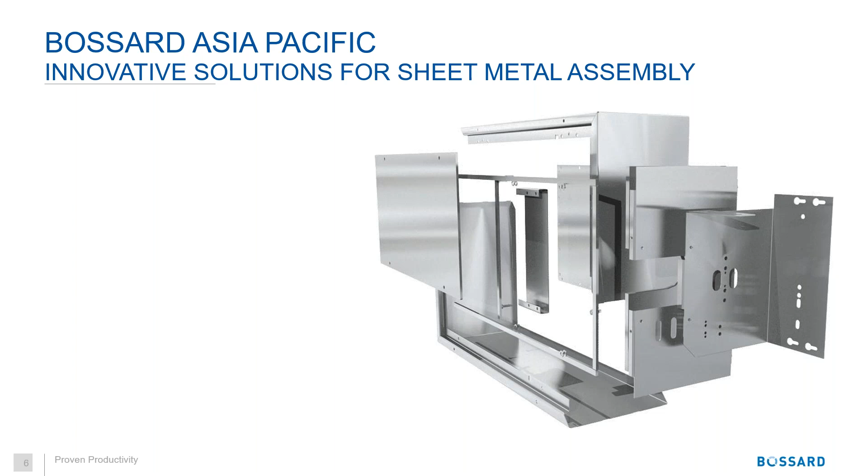So what are the motivations of the session this afternoon? Why are we taking 45 minutes? Some of the questions that our customers generally ask is, what are the fastening technologies for sheet metal assembly and how many solutions do I have? Well, it very much depends. For example, on this type of application, it depends on whether you are trying to join edges together, whether you are trying to run cables inside the box, or if you are trying to fix other elements within the box.

If, for example, you are joining 2 sides of the panel together, you might want to use either thread forming screws, self-clinching fasteners, or riveting technology. Once you've chosen the technologies, other solutions are offered to you in terms of which installation equipment is the most suitable for the application.

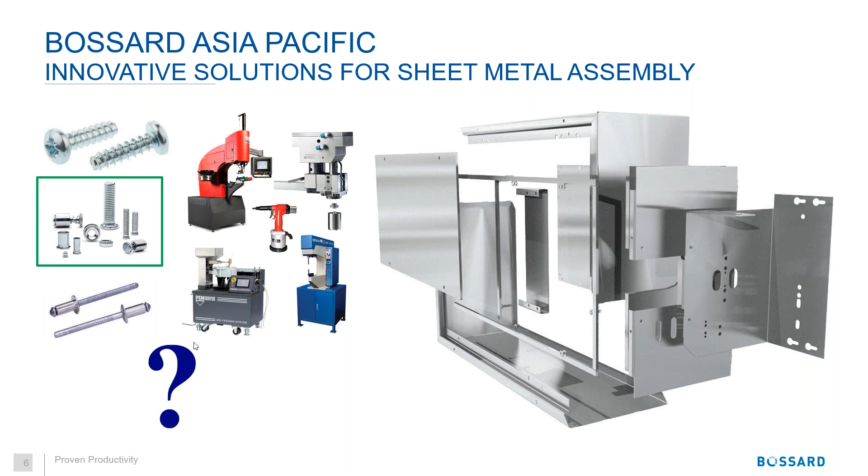Another motivation for the webinar this afternoon is, why do we even care about fastening technologies? Sometimes fasteners are overlooked as they seem quite simple. Here is what might happen if you do not properly select your fasteners. It can very easily fail.

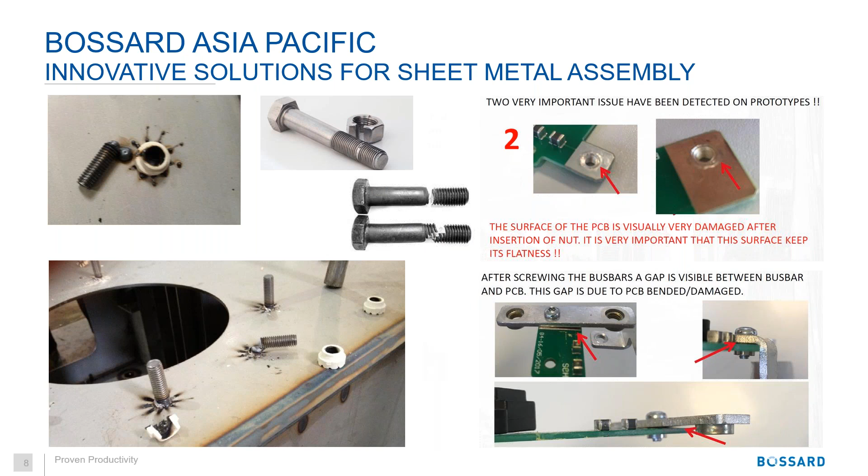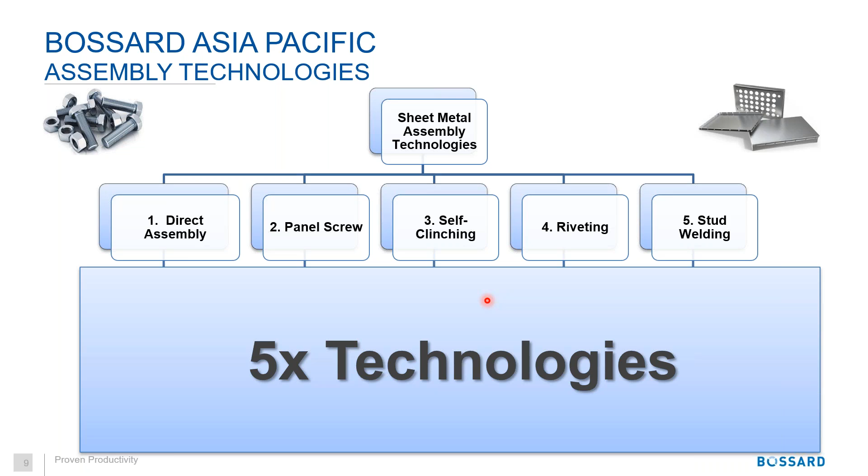So the way spot welding works is with 2 copper anodes, which are then pressed onto the panel. An electric current is then passed through between the 2 anodes, which forms a small weld nugget. With the pressure being applied on the copper anodes, it then joins the 2 panels together. It is a welding process that is characterized by very short welding time. We're looking at 10 to 100 milliseconds, and there is no heat applied in the remainder of the sheet. It's only localized here at the junction of the 2 panels.

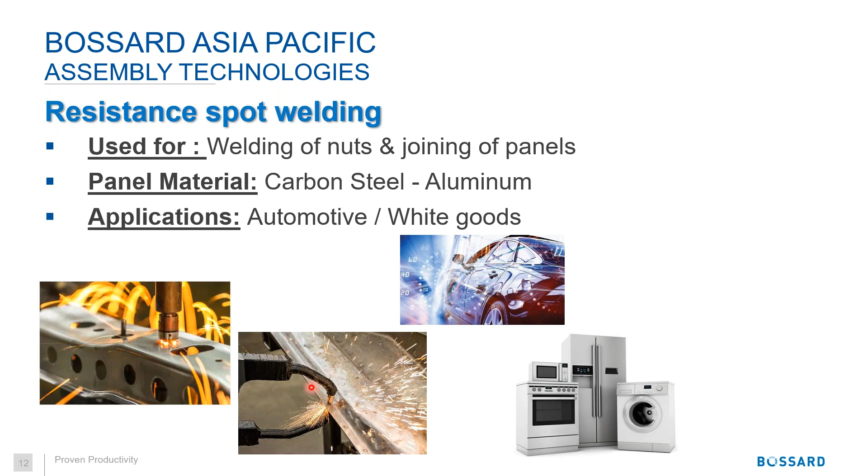It is widely used for welding of carbon steel nuts and also for junctions of 2 or more panels. In terms of the material on which it is used, carbon steel and aluminum, and the automotive and consumer appliance industries are heavy users of these technologies. The equipment cost, as it is pretty common in the market, is now fairly inexpensive to acquire.

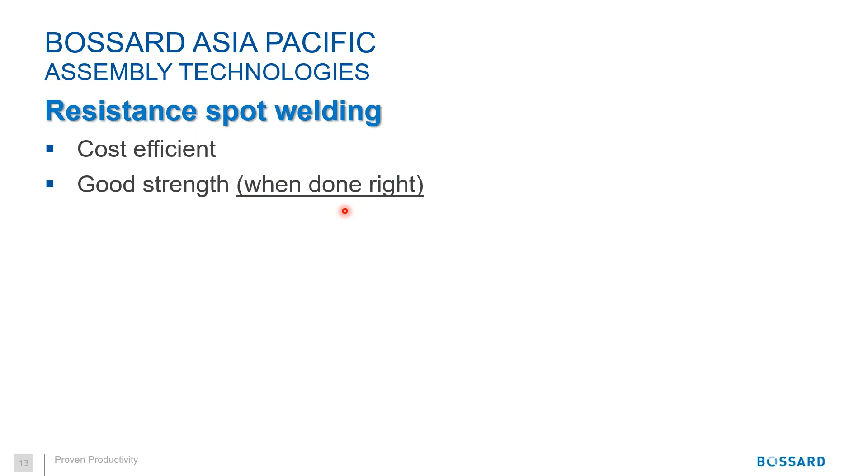It's pretty cost efficient and gives good strength when done right. I say 'done right' because you have quite a few parameters to input when using this technology, which can be difficult to control.

If too little energy is applied, there will not be enough melting, which results in a poor weld. If too much energy is applied, it can create a hole through your panel.

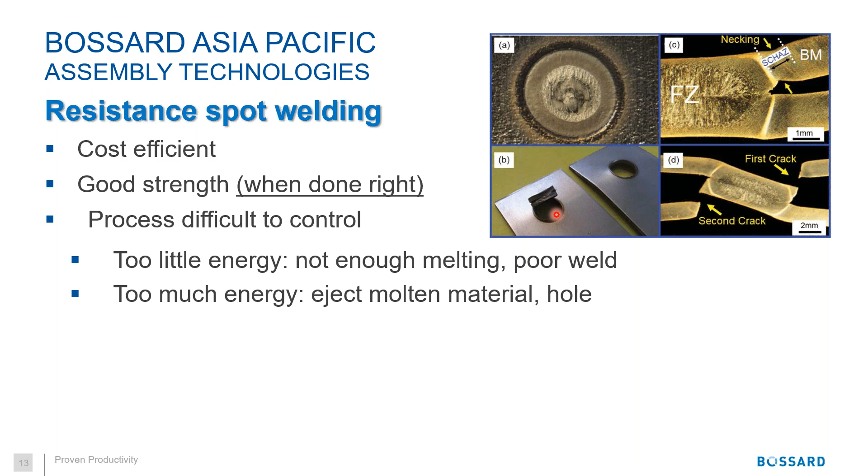It tends to harden the material and cause it to warp quite significantly if it is on a very thin piece of panel. And because of the electric current being applied, it reduces fatigue strength and it can also stretch the material and invite rust, as shown on this photo here.

Finally, no dissimilar assembly is possible, only carbon steel on carbon steel or aluminum on aluminum. So what other alternative would we have to try and replace spot welding technology?

One that I would like to introduce this afternoon is called Spot Fast. Spot Fast is actually a fastener that is pressed into the panels.

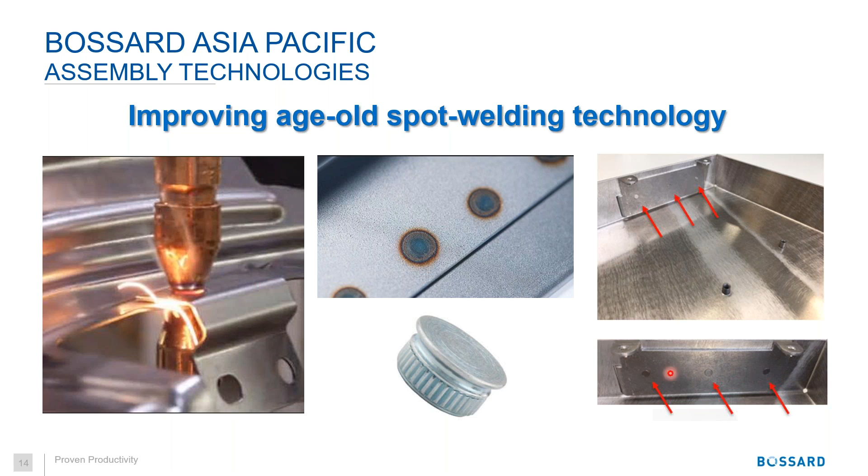It provides for a flush assembly with no visible mark. It can be used to join metal to metal, similar to spot welding, but it can also be used on dissimilar assemblies, on metal over plastic, or even on PCB over plastic.

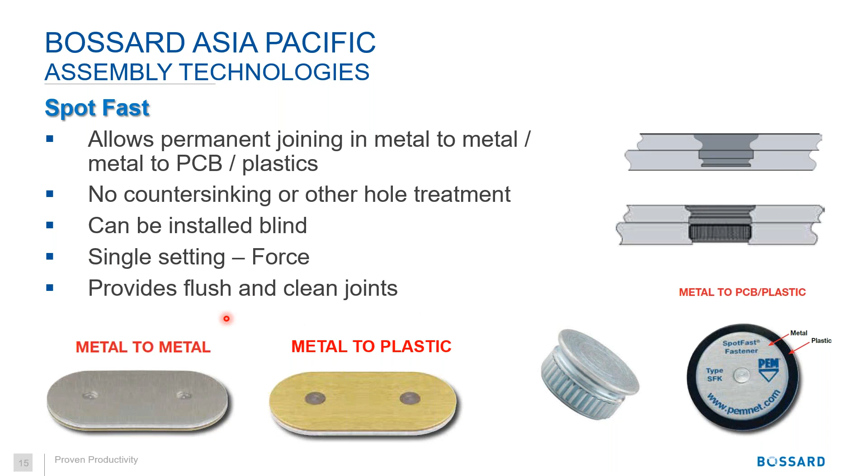No countersinking hole is needed or other treatment. It can be installed in a blind setting, or it can also be installed in through application. Very simple process to control, as there is only one single setting, which is the force, and it provides flush and, as I've mentioned earlier, clean joints with no burn marks.

Now, the second technology that I would like to review this afternoon is direct assembly screws, also called thread forming screws.

So how many types are available and what are the differences between those types? Very broadly, we can categorize into three main categories. The first one is self-drilling.

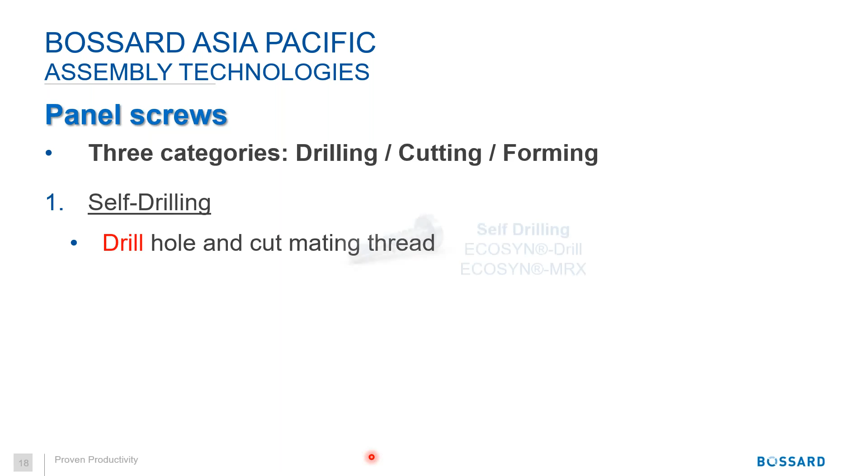In the case of self-drilling, no pre-hole is required. When the screw is driven into the material, it will cut its own hole and it will also cut its own matching threads.

In that case, there is a need to drill a hole, but there is no need to tap a thread. The thread will be cut into the material as the screw is driven.

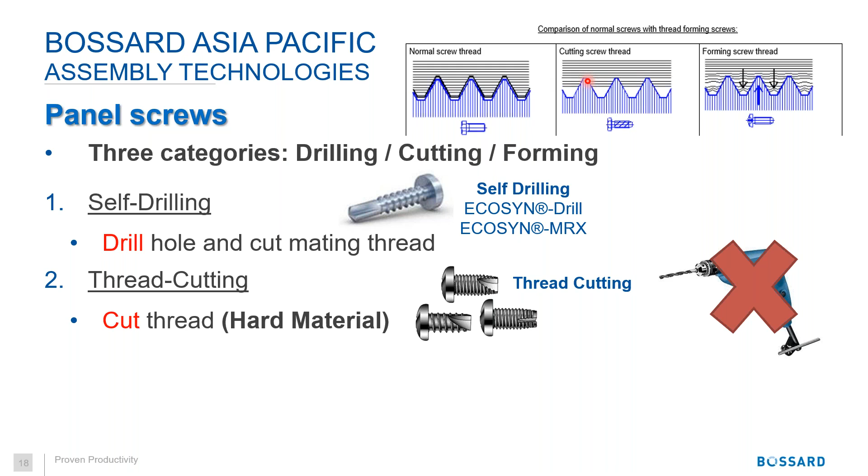And the last category, which is widely used on soft material, will not cut the thread, but instead the thread will be formed into the matching part.

So why is this important? Because if you have an application that is subject to vibration, by this effect of forming the threads, it will create no play between the mating thread and will therefore be suitable for anti-loosening applications.

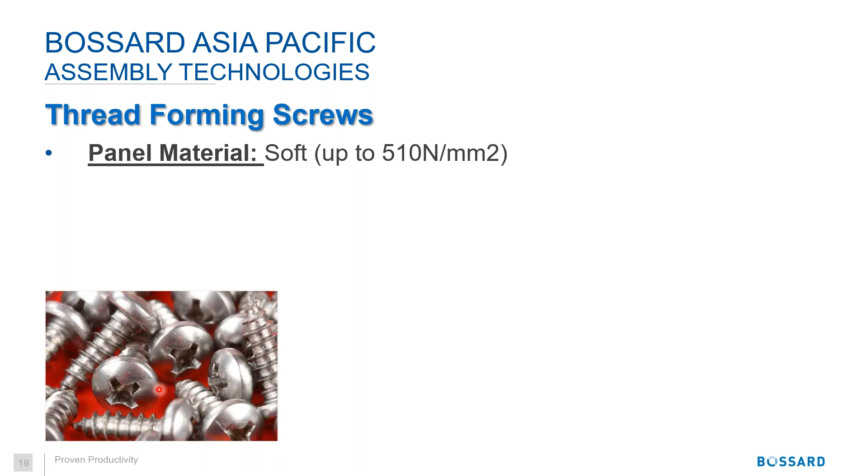Panel screws are generally used on soft material with a tensile strength of up to 510 Newton per millimeter square, therefore used on magnesium or aluminum die casting, on white goods, plastic housing, or various machineries. And there is no equipment required. Equipment cost is close to zero.

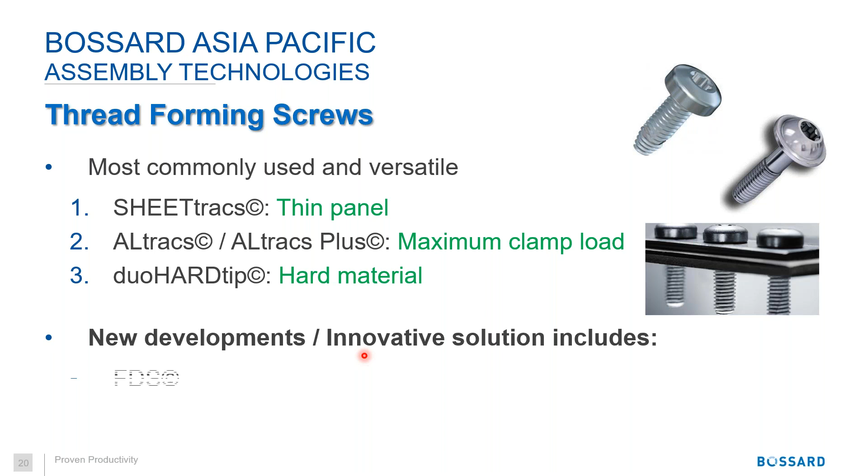Now, what are the most widely used thread forming screws in the industries? Three main types: SHEETtracs on thin panels, ALtracs for increased clamp load, and duoHARDtip on hard materials. And very recently, a few years ago, a new innovation came out in the market, that is the FDS screws that we're going to be looking at.

So I just wanted to introduce the more commonly used type of thread forming screws on panel, which is the SHEETtracs. The SHEETtracs is used to join thin sheets from 0.5 to 1.5 millimeter. It exhibits high strength, and as I've explained earlier, it is suitable for high vibration assemblies, and the assembly is fairly simple.

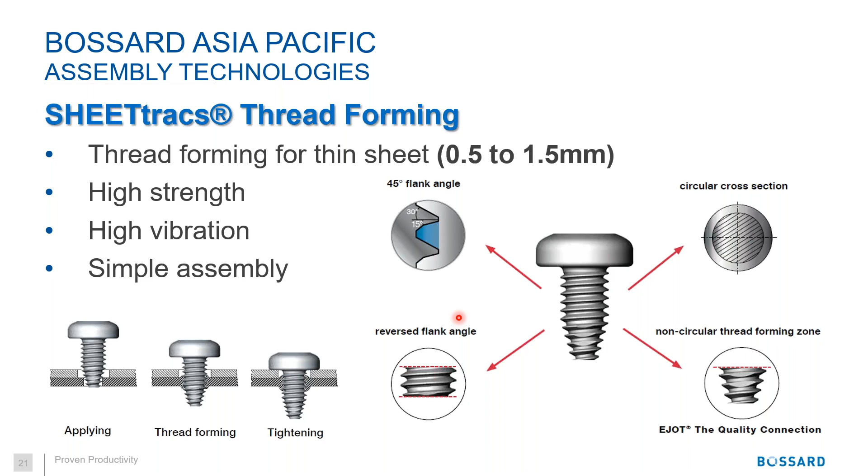I think it was pretty obvious from the video the thread forming process and how the thread is actually formed into the panels. For the subsequent screws, for the sake of time today, I will not get into the details of all those various panel screws, but I've prepared a handout available on the GoToWebinar platform that you can download. On this handout you'll have all the basic information about those alternative solutions for panel screws.

Now I would like to introduce a pretty new type of panel screw that goes by the name of flow drilling screws, which provides unique features and was released in the market roughly 4 or 5 years ago. To introduce this technology better, I would like to broadcast a quick video about it.

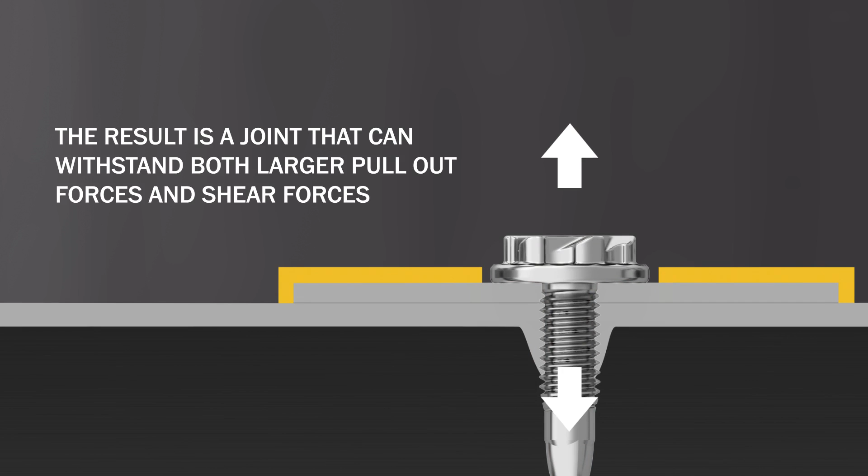So the video showed an example of the FDS applied on a ladder, but it's also very widely used for any type of high volume applications. Automotive is one of them, where you have to assemble panels and require very high vibration resistance working with high strength steel, or when you need a very high loosening torque.

It is a breakthrough technology because this is the only type of panel screw that can actually be automated, does not require a pre-hole, and actually forms a thread into the mating material. It can also be removed, which makes it usable for maintenance purposes.

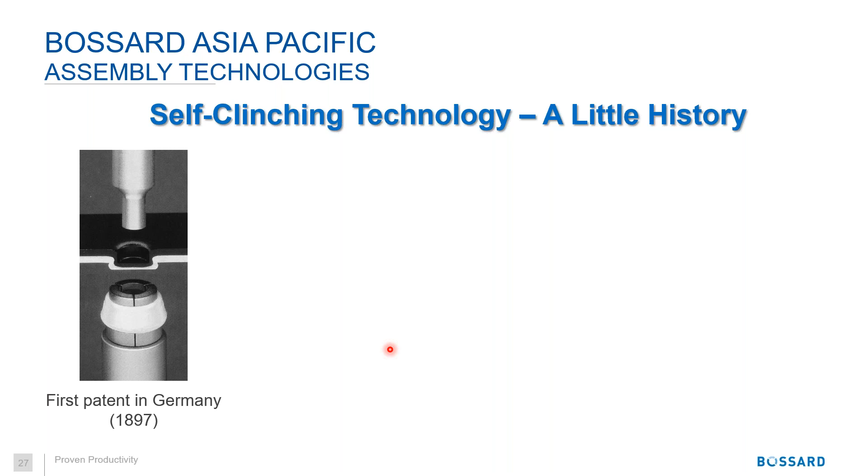So we'll be moving on to the third sheet metal technology for this webinar, which is self-clinching technology. A little bit of history: it's actually not a new technology, as the first patent was filed in Germany at the end of the 19th century. But it fell out of favor and industries did not really start using it until the beginning of the 80s in Germany with Audi, during which the building of the car used this technology very extensively.

I'll give you a little primer on this technology. It can either be used to permanently join panels together, similar to the spot welding technology we covered in the beginning. A punch would press the two panels, which are held by a die. Through applying pressure between the two panels, an interlock is formed, which permanently joins the panels together.

Self-clinching technology can also be used for non-permanent joining through the use of a nut. It's also a cold forming process during which the nut is pressed onto the panel, and the panel cold flows into the grooves of the nut, and the screw is run to assemble the panel.

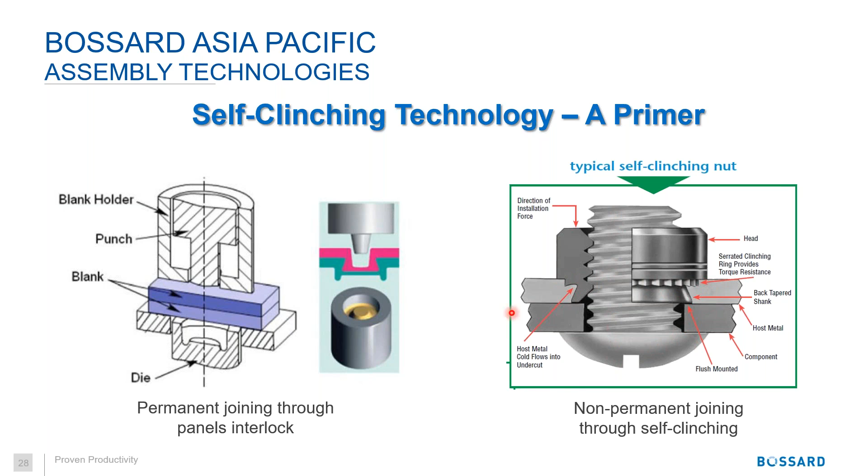Now, self-clinching technology was designed for thin panels. There is no rework necessarily, and high thread strength can be achieved up to 10.9. It has very low energy cost as compared to welding technology. It can be used on zinc-plated or even galvanized panels. And there is a wide product range for this technology, from nuts, studs, standoffs, and so forth.

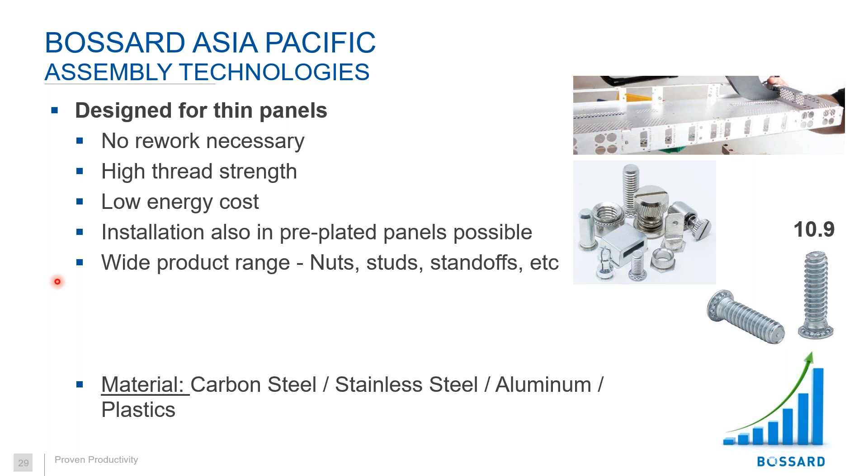Now there are three main limitations I wanted to point out about this technology. The first limitation is the minimum distance from the axis of the fastener to the edge of the panel. If the fastener is positioned too close to the edge, the edge will actually bend up, will bulge out, because of the pressure applied by the punch.

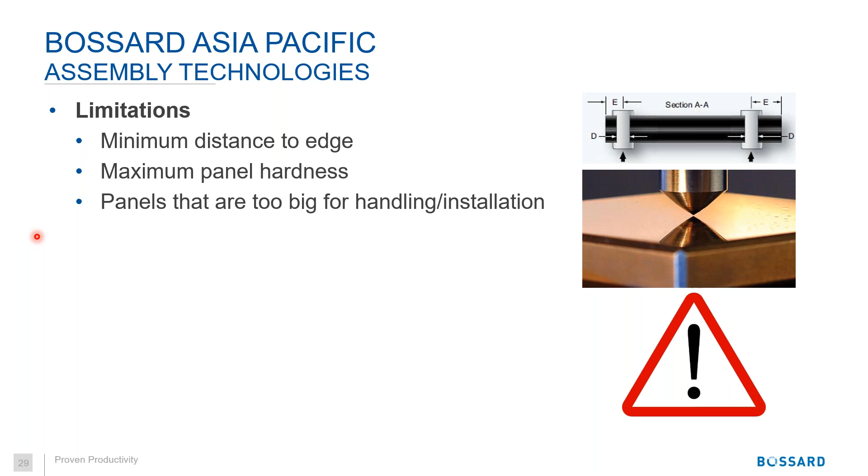Another limitation is the maximum panel hardness. I mentioned that it is a cold forming process, therefore the material must be softer than the hardness of the fastener so that it can actually cold flow into the fastener. And the last limitation is panels that are too big for handling, in case you are not using an automated setup and have operators needing to handle the panel.

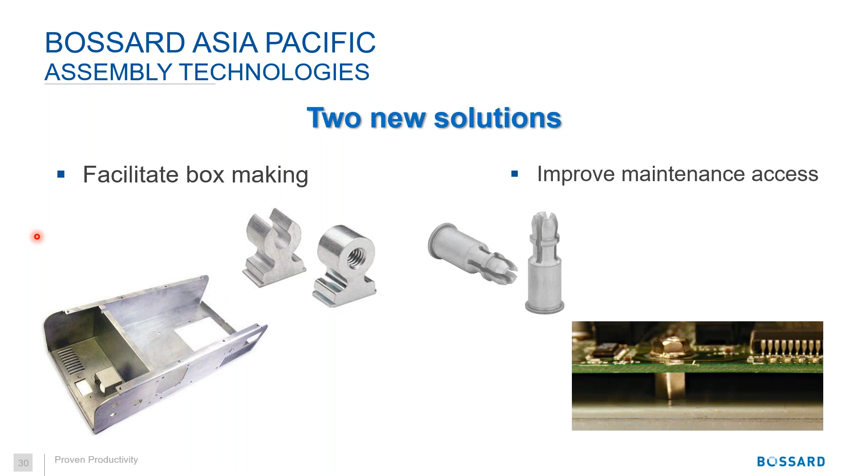Now I would like to introduce two new products that were released in recent years in this technology. The first one is to facilitate box making, and the second one is to improve spacing and also improve maintenance access. Let's look at them one at a time.

So when you are building a box, when you are assembling two panels at a 90-degree angle, or when you are assembling dividers inside the box, you would need bent edges or angle brackets, which can be quite time consuming and wasteful, as extra material is needed to join the two faces. Now with these new solutions, a small cutout is required in the panel and the fastener is then clinched through it, and the side panel is assembled directly at a 90-degree angle onto the angle. That way, no bent flanges and no additional angle brackets are required.

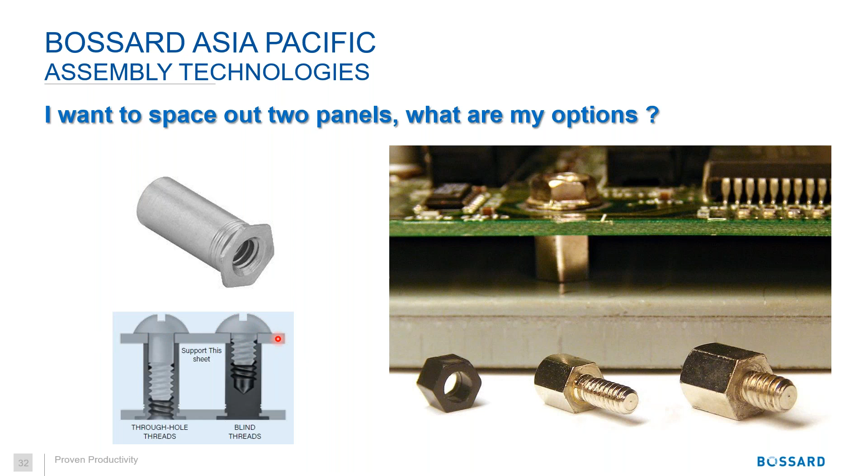Now, if you want to space out two panels, what is generally used in the industry is a combination of a standoff and a screw. The standoff is assembled onto the bottom panel, the top panel is positioned over the standoff, and the screws are used to hold the assembly together.

But if you are looking for something a bit more maintenance friendly or a bit faster, what you could consider is a snap top clinching item. With the snap top, it is clinched onto the bottom panel, and the top panel is then manually inserted by hand into the snap top elements. It can then be removed just by pressing here at the bottom of the panel and applying force upwards to work it out of the snap top fasteners.

Now, what about the installation of the fasteners? What kind of tools are available for this?

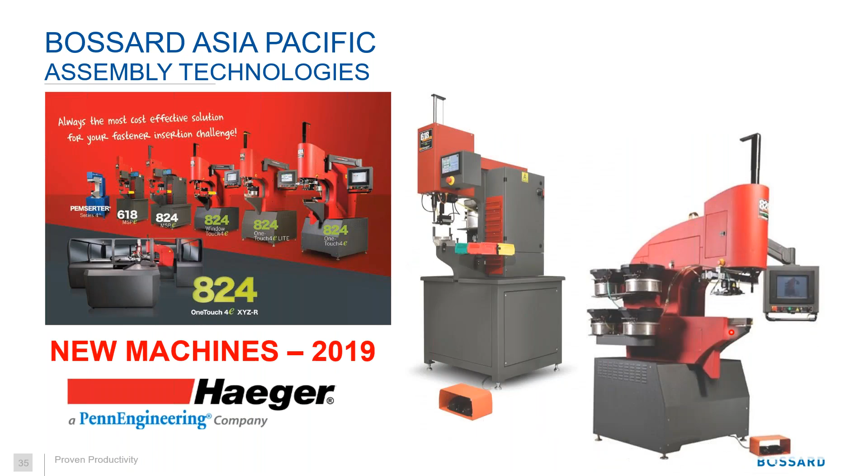A new product line that came out last year is Haeger. Haeger is not new in the market, but they just released the 5th generation of their self-clinching machines, which I would like to introduce today. So for this, I've prepared a video showing an overview of this product line.

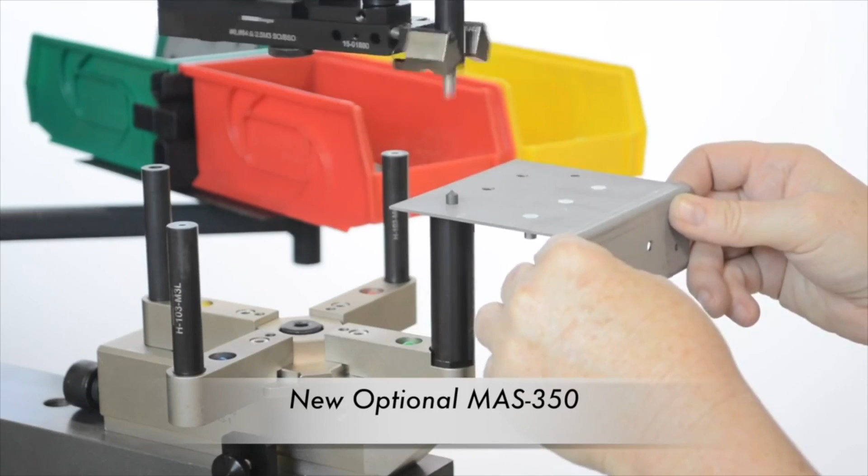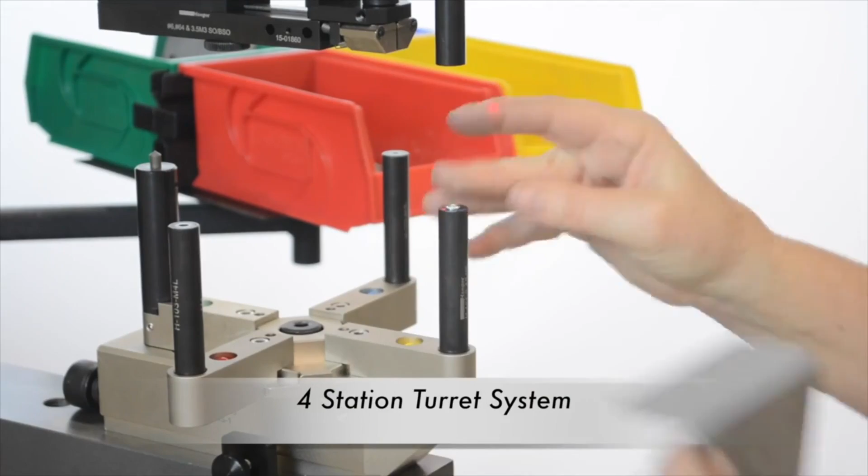The 618 and 824 MSP bring you the advantage of the new optional MAS 350 auto feed. The larger capacity bowl design allows insertion of fasteners up to size 3/8 or M10. Multiple part handling in the fastener insertion area can be eliminated with this multi-station press that combines the PLC touchscreen with electronically controlled hydraulics and the turret insertion system, allowing insertion of more than one type of fastener in one single workpiece handling. The 618 MSPE increases productivity up to 70% over the legendary 618 Plus.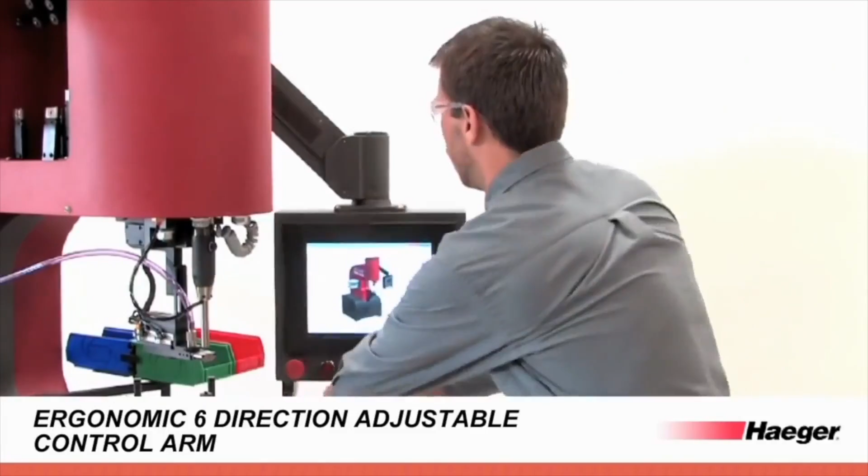The OneTouch 4E Lite brings you the advantages of the 824 Window Touch and the productivity of the OneTouch by allowing automatic feeding of 2 different types of fasteners in one single workpiece handling. Features include easy-to-use insertion logic software, increased productivity of up to 30% over the 824 Window Touch-4, full process control in 2 stations through fastener detection and fastener length detection, and the dual automatic upper station, which changes the upper tools and insertion stations automatically.

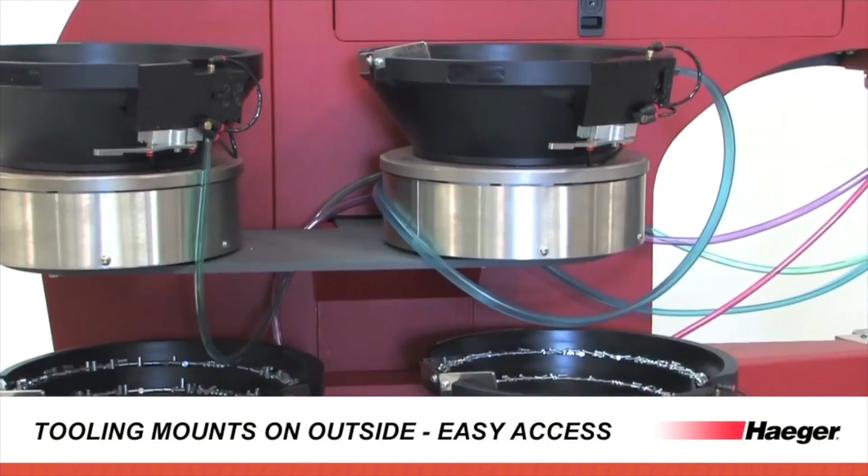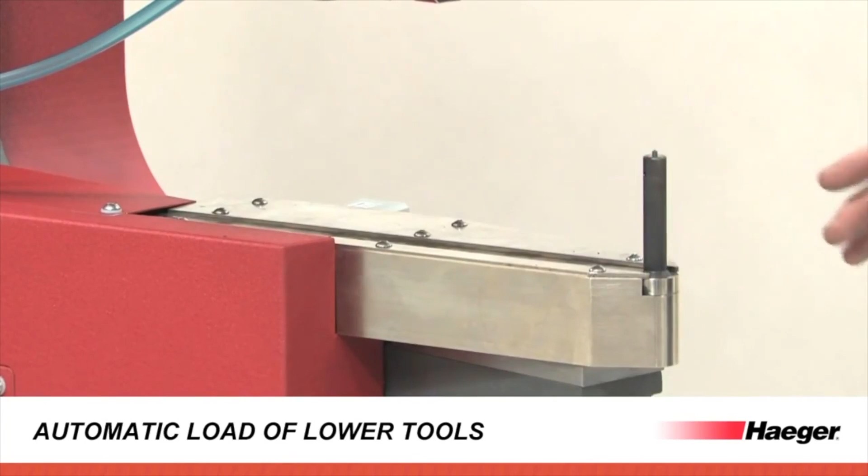The 824 OneTouch 4E includes many time-saving new features, such as automatic feeding of 4 different types of fasteners in one single workpiece handling, increased productivity of up to 50% over the 824 Window Touch-4, full process control in all 4 stations through fastener detection and fastener length detection, tooling which mounts on the outside for easy access. All bowl controls are integrated within the insertion logic software, with quick and easy tool retrieval and shuttle plate mount, automatic loading of lower tools, and 3-second automatic tool change.

All of our Dash 4 machines come standard with our quick change tooling, which virtually eliminates any alignment or setup during changeover. Tooling changes can be completed in less than 3 minutes, and all bowl controls are integrated within our insertion logic software, eliminating the need for operators to adjust bowl settings during setup.

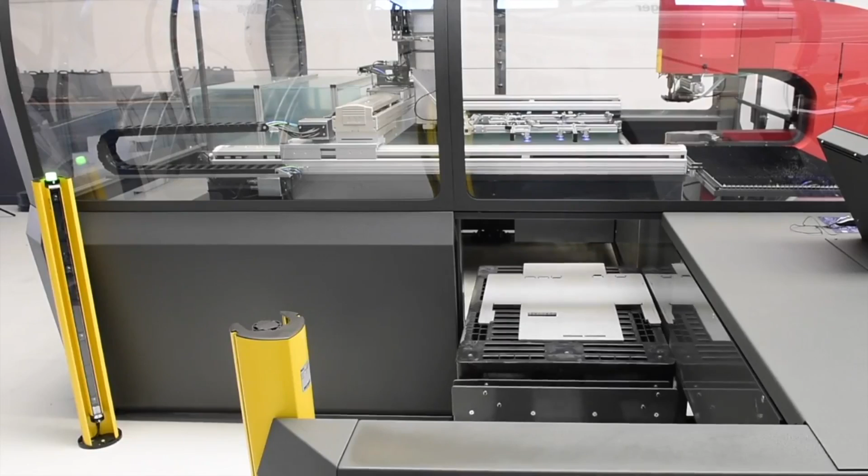The 824 One-Touch 4E XYZR is a 4-axis, fully robotic system combining the highest productivity with process control. Up to 6 MAS 350 autofeed systems can be installed, allowing insertion of up to 6 different pieces of hardware in one single pass on both sides of the workpiece. The XYZR offers 0 errors in the hardware insertion process, as well as unmanned production time of up to 8 hours, depending on workpiece size.

Okay, so yes, I wanted to show that video that gives a comprehensive overview of the entire product line, from the very simple, requiring an operator to handle, type of equipment, all the way to the fully automated rig with no need for operator interaction.

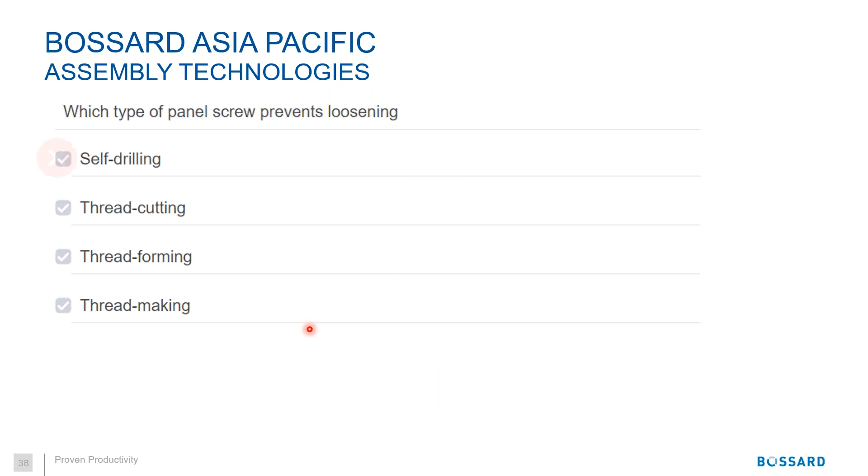As per our discussion, the only type of screw that prevents loosening is the thread forming screw, because the matching thread is formed into the material and not cut.

Now, one more question which I'm going to launch right now is: what is not a limitation of the clinching technology as per our discussion? Is it maximum panel hardness, installation on pre-plated panels, or minimum distance to edge?

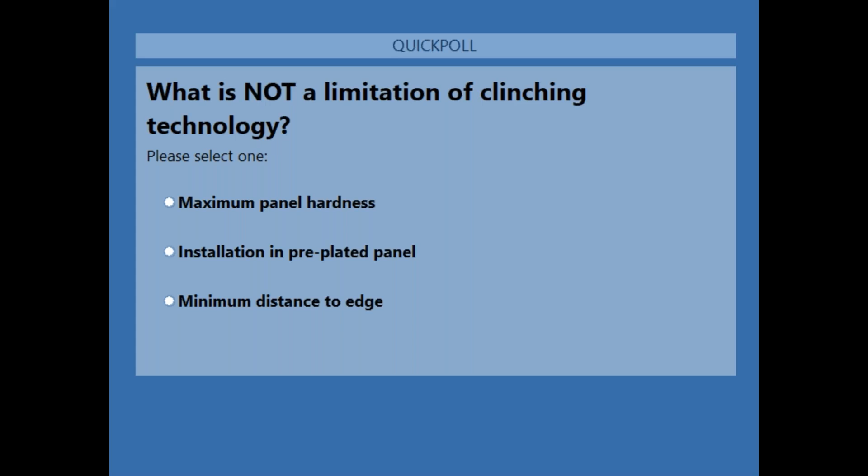Okay, so I'm now going to close it and give the right answer. As per our discussion, what is not a limitation of clinching technology is installation in pre-plated materials. We talked about 3 limitations: minimum distance to edge, maximum panel hardness, and panels which are too big for handling.

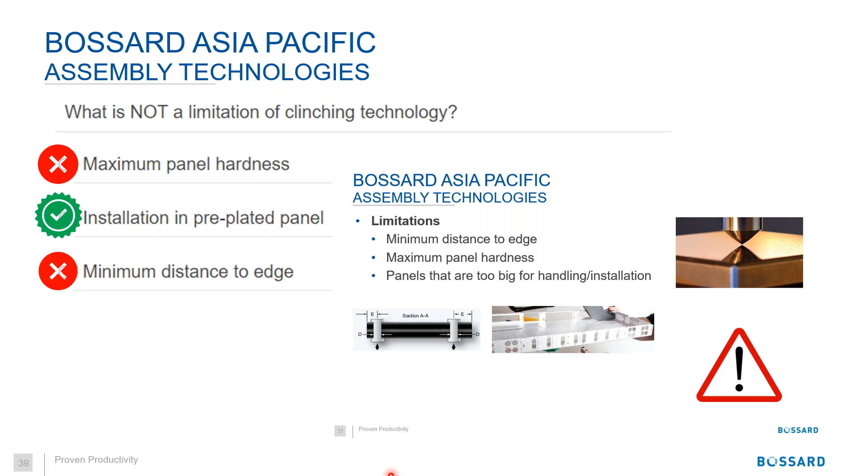So now we are moving on to our 4th technology for this webinar, which is the riveting technology.

So how many various types of rivets are in the market? Are we looking at just a few or maybe a dozen? Well, in fact, four main categories are available in the market. The first category, which was the first one invented, is the solid type of rivet.

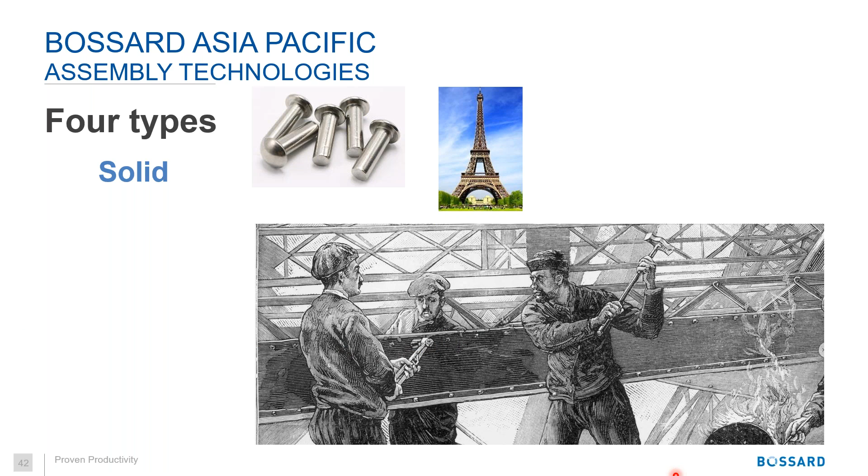One very good example of the solid type is actually on the Eiffel Tower. The Eiffel Tower is assembled with 2.5 million rivets, and how they were set back in the day was by using 3 persons: one at the back to hold the rivet, another who would first preheat the rivet and then bang it into place to form the head. So 100 years ago, it would actually require 3 persons to assemble only one rivet.

Now, the second category, which is, I would say, an enhancement of the solid type, is the tubular type. This time the section of the rivet is hollow so that you can gain on weight. For example, used on ladders and installed with an orbital riveter.

The third type of rivet is the split rivet. The split rivet is generally used on very soft types of material, for example leather, fabric, or plastic material. And finally, the last type of rivet, which is probably the one you are familiar with, is the blind type of rivet.

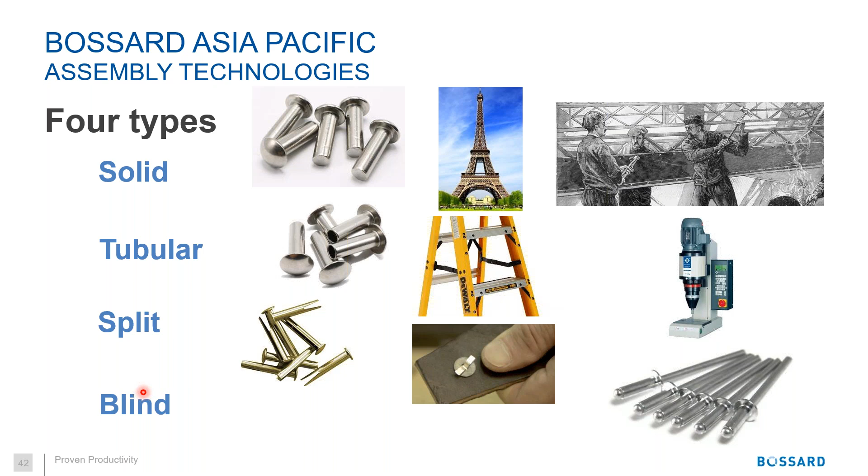In terms of blind rivets, you can come across 2 types: the non-structural rivet and the structural rivet, for more heavy-duty applications. A cross section of the rivet shows that it's actually a 2-part component with a head and a mandrel.

What happens when the rivet is assembled? The pulling head will grab the mandrel and pull it upward. There is a small notch at the bottom of the mandrel to weaken the section, so that when it is pulled upward, the rivet will always fail in that particular section, and then the mandrel is taken away and dropped out.

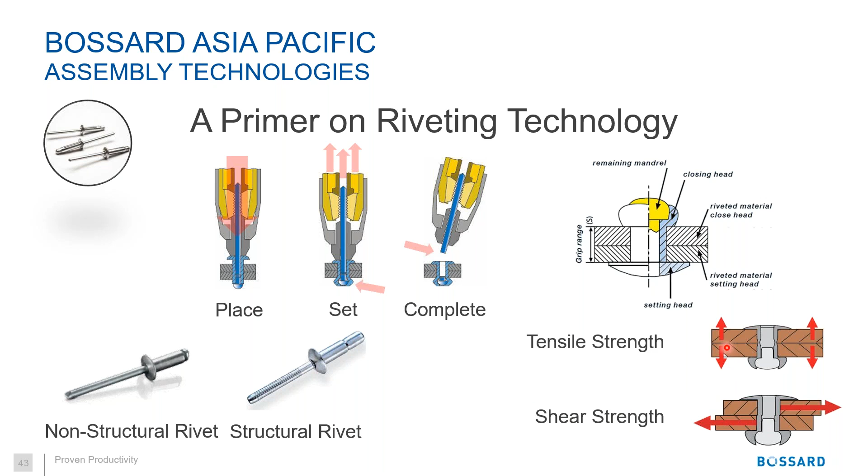Rivets are characterized by 2 types of strength: horizontal strength through shear, and vertical strength through tensile strength.

In terms of tooling, if it is low production runs, hand tools can be used, or if it's a mid production run, I would say pneumatic or hydropneumatic tools are generally used. But now, what if you are looking for higher production rate? What's available in the market? So we'll be looking at 2 technologies.

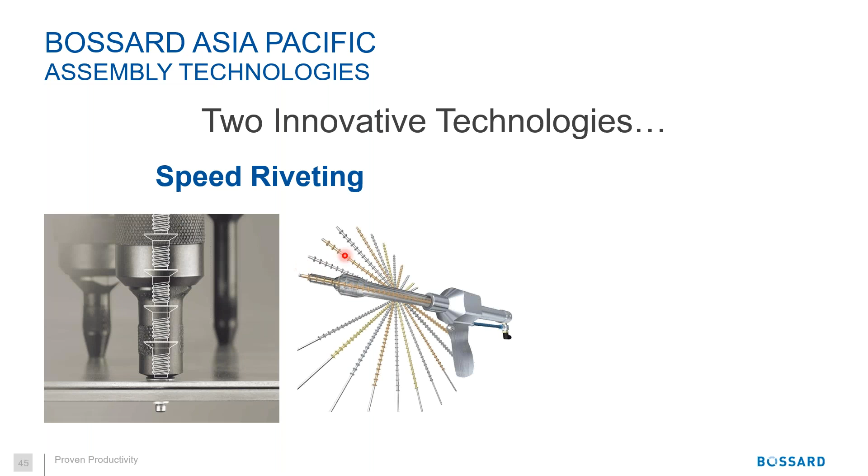The first one is the speed rivet technology, and the second one is a fully automated type of setup for assembly of rivets.

Taking the speed rivet as our first technology, here is the classic breakstem rivet, and here's the type of rivet that is used with speed rivet. As you can see, it only has a head with no mandrel. What happens is this head is mounted into a loading mandrel, which is then inserted into the installation gun. Up to 100 pieces of rivets can be installed onto one installation mandrel. As you can see on this animation, the mandrel is inserted into the gun, and then the rivet is pressed onto the 2 panels to join them.

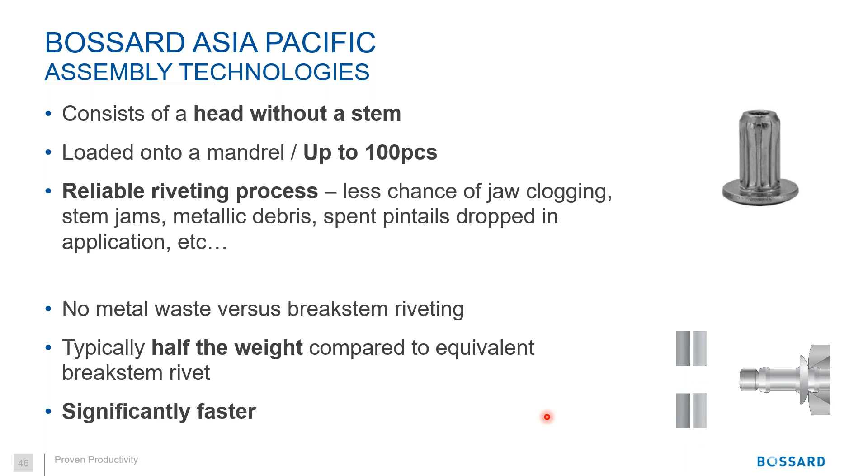And it is obviously significantly faster because you would not need an operator to manually reload the rivet one at a time into the gun.

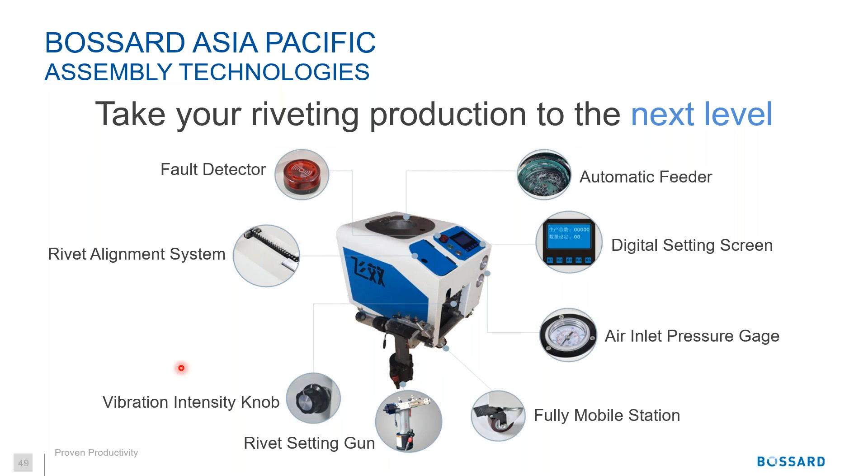So in order to illustrate this maybe a little bit better, I have inserted a video which I would like to share with you.

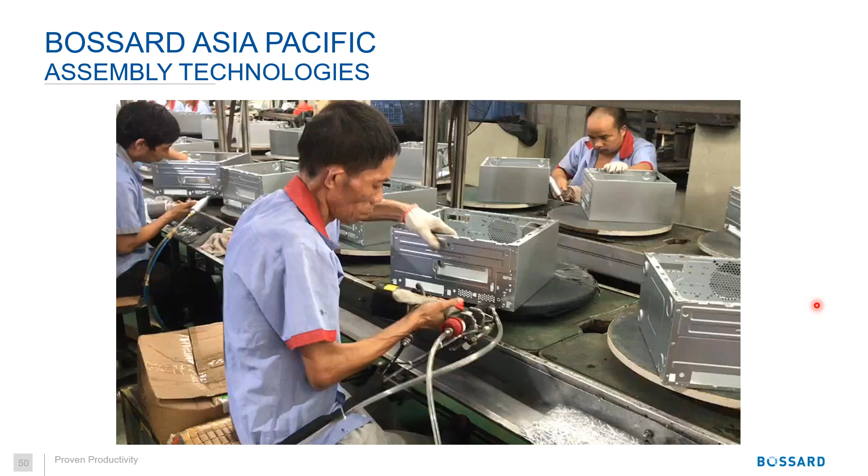So as you've seen through the video, it is for high production run when really the speed is paramount. In that case, the rivet is not inserted, but it's blown through the hoses and brought to the actuation mechanism of the rivet gun. And it can also be fully automated with no need for an operator, using robots. One good example of this is Huawei in South China, for which you can see photos inside the factory that use this type of riveting equipment.

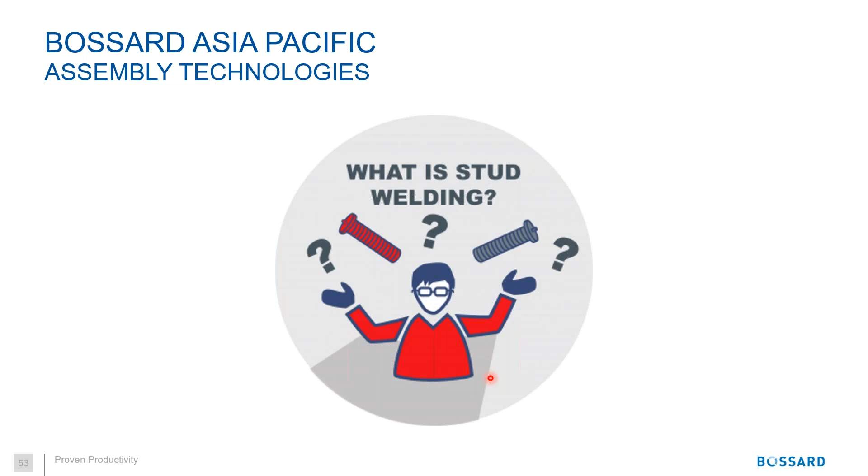Now, the last technology we are going to review this afternoon is stud welding technology. First, what is stud welding and on what type of application is it used? Stud welding can be this, can be a thread assembled onto a panel, but it can also be this. It can also be shear connectors installed onto beams for a concrete slab to be poured over it.

But so how did this technology come about? It actually came about in the late 40s as part of the American World War effort. At that time, they were building ships, and how they would assemble wooden deck onto the ship would require drilling the decks, which was a very lengthy and cumbersome process. So the stud welding technology was actually used so that the wooden deck could be assembled directly without any need for drilling of the deck. The pioneer of this technology is the American brand and leader in the market, Nelson.

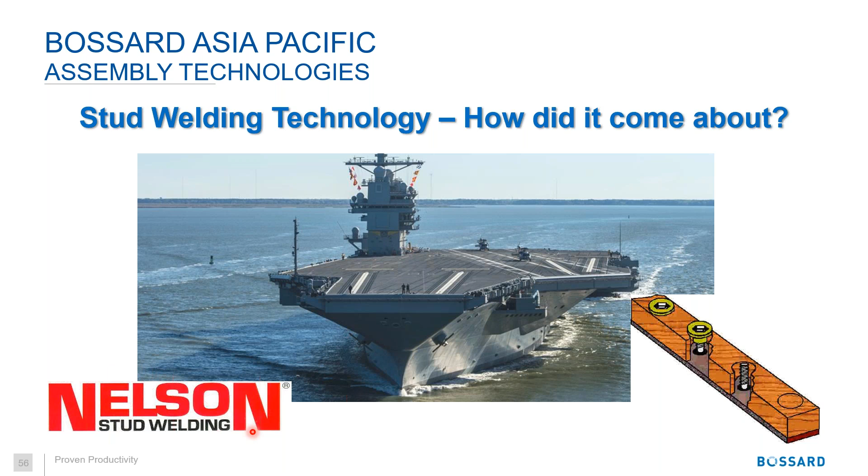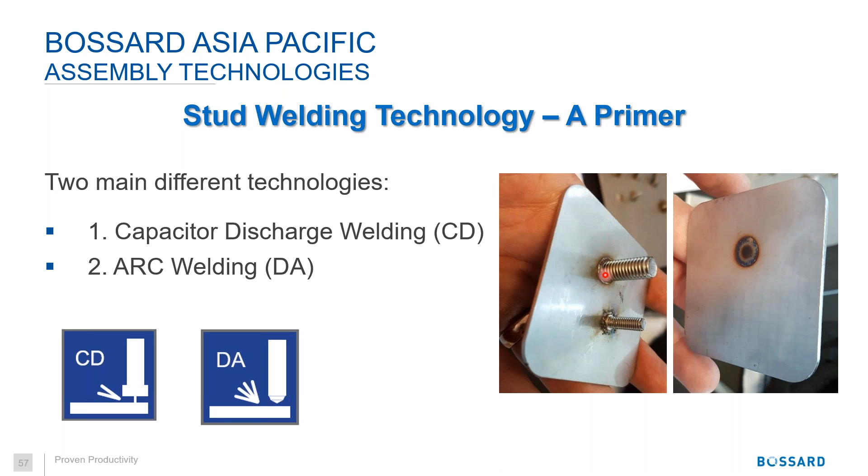Two main types of stud welding technology: capacitor discharge and arc welding. You have the two technologies here on the right-hand side. The top one is the drawn arc technology. As you can see, the quality of the weld looks a lot better than for capacitor discharge. This technology is generally used for high-strength applications, but it will leave a visible burn mark on the back of the panel.

Capacitor discharge studs, three things to remember: it's an extremely fast technology, used with small diameters, and can be welded on aluminum and also copper panel. Whereas with the drawn arc technology, it's mostly used for high strength applications with bigger diameter, and this time another element is needed, which is a ceramic ferrule that we see here, which contains the molten weld in this area.

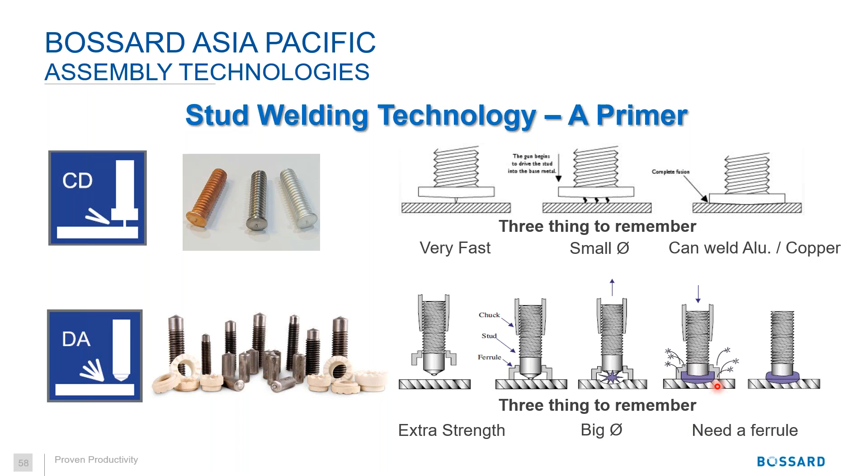Now, here's a very brief overview of some applications for capacitor discharge: copper panel, aluminum, stainless steels, or enclosures, where the cosmetic finish is actually important for the application. And where cosmetic is not important, but strength is vital, drawn arc technology should be used, for example, on highway or switchgear box or this type of roller plates.

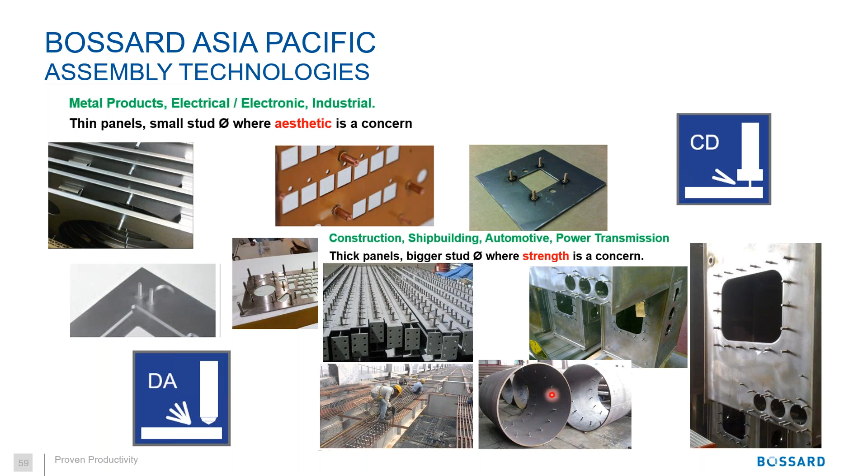Now, these technologies are pretty old technologies. In fact, I mentioned they were invented in the late 40s. So is there anything new that has been brought to the market? In fact, 4 years ago, a new revolutionary technology was released, which is the stud welding with rotating magnetic field technology, for which I'm going to show a video.

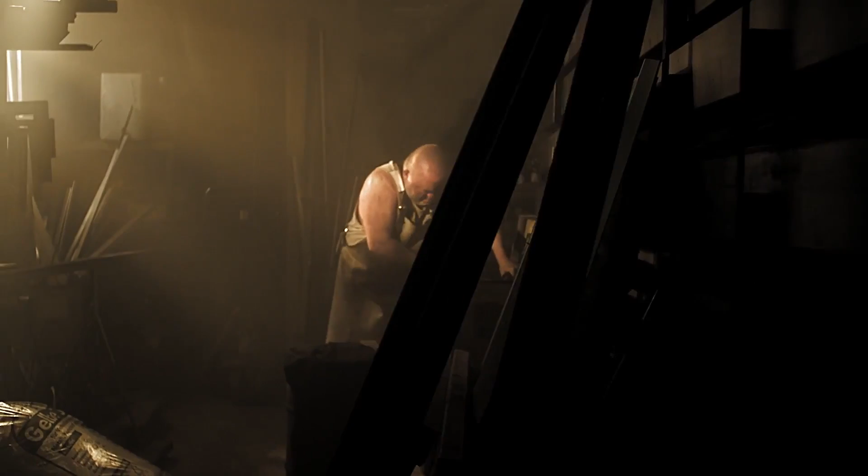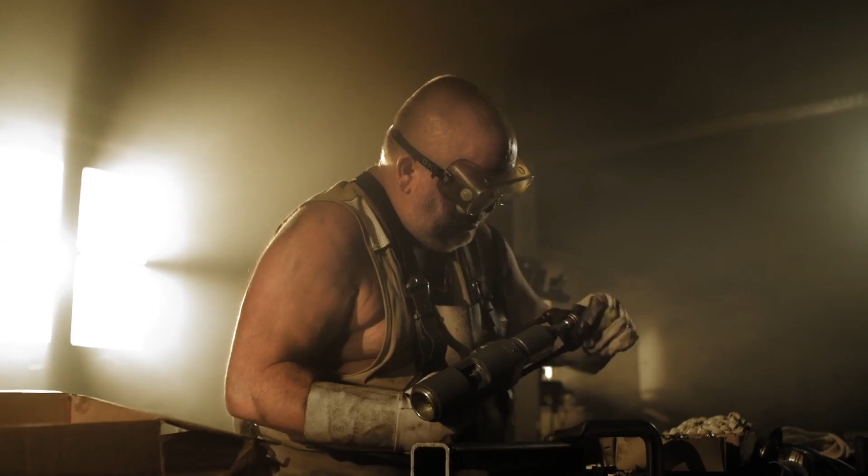The valiant little welder. There are those who claim there is a new welding method. There are those who claim there is none. But we say SRM is a new method. Once upon a time, in a faraway place, there lived an honest, hard-working locksmith who spent all his days slaving in his workshop. He had to spend all his time welding, and as he didn't know any better, he used an age-old welding method. Day in, day out, he worked away without ever complaining, even though the work was cumbersome and dirty. The heat was sweltering, sparks showered and smoke belched around him. It was loud and stank, and those dreaded ceramic rings, unwieldy and so very hard to clasp, became so hot and caused so much dirt.

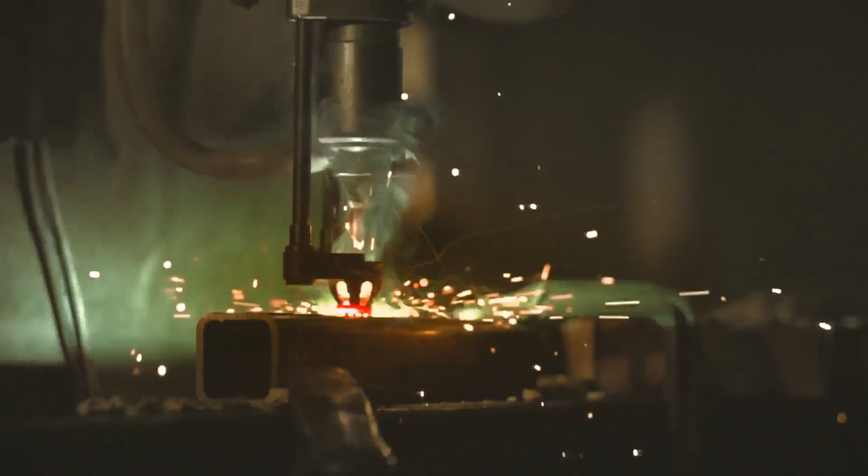The little locksmith, however, was happy with his lot, even though at times he secretly wished that his life could be a little easier.

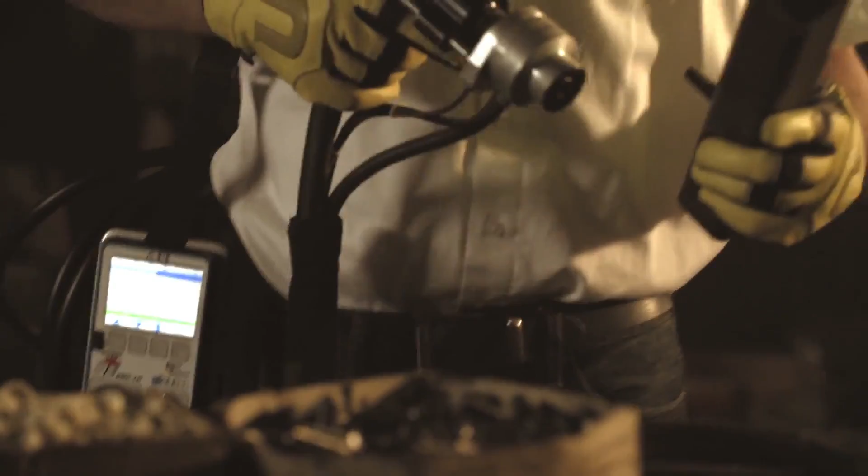And look, his wish really did come true. A clever, resourceful stud welding manufacturer came up with a new welding method called SRM, which was light years ahead of its time. Everything is so simple, quick, and clean as a whistle. A short hissing, and look, the stud is already positioned.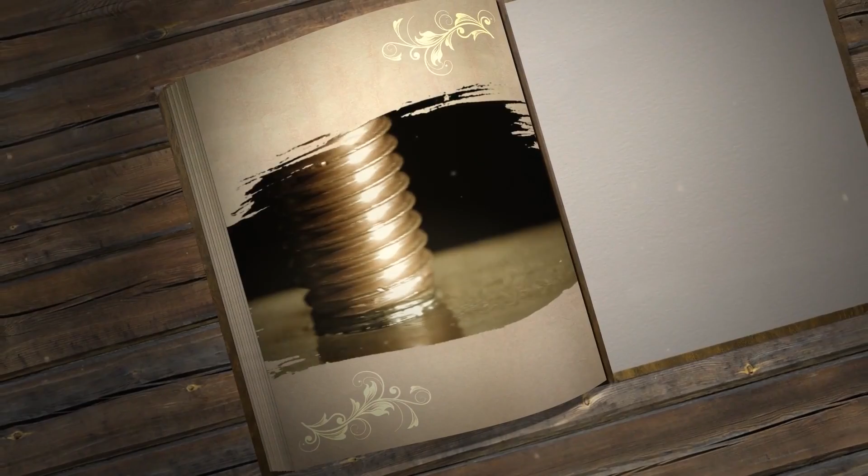From then on, the little locksmith lived happily ever after. And if by chance he is alive to this day, then you may be certain he's still welding with SRM. And perhaps in your town, there's also a hard-working locksmith who is dreaming of a better weld.

So this technology shown in the video is called Symmetrical Rotation Magnetic, because it uses the power of a magnetic field. When the electric arc is ignited, it will be guided in a rotating way by the magnetic field. That's the secret and the enhancement of the technology.

Previously, the electric arc was not guided, so it would pretty much go in any direction with no rotation over the stud. The advantage of using this is that it can evenly melt the stud and evenly melt the panel for a very clean and high strength fusion weld.

And since this technology enables the electric arc to be guided, hexagonal nuts can also be welded with it. This type of nut can only be welded with SRM, not with drawn arc or capacitor discharge technology.

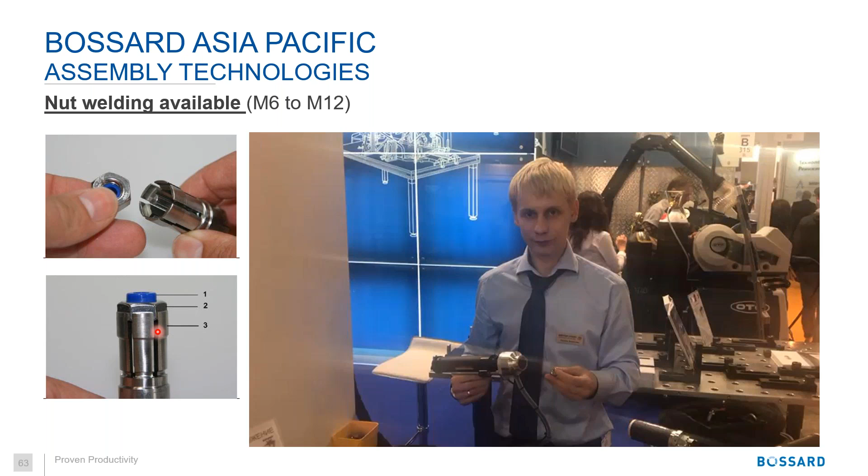Okay, so we've reviewed the 5 main technologies that I wanted to cover today. The objective was to increase process and product efficiency, to spot-weld faster, to use new types of panel screws, to increase production time with better installation equipment and fasteners that can be automated, reduce cost, improve quality, and also provide high-strength connection in thin panel applications.

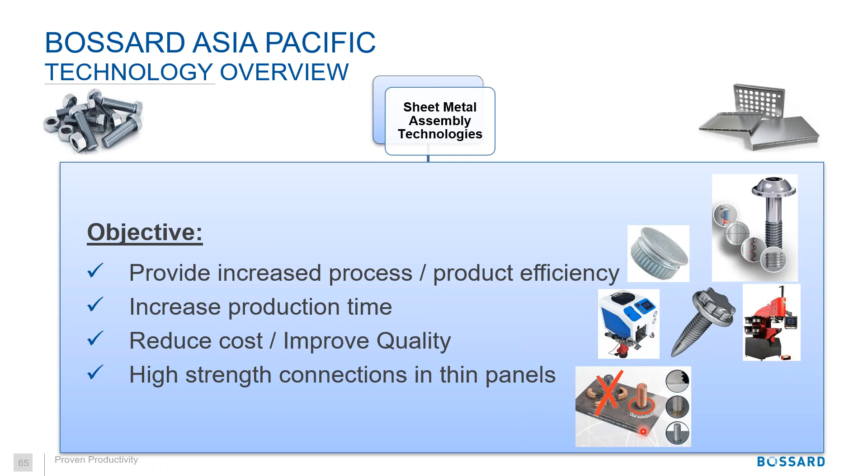Now, the question I always get from my customers is: which of these technologies is the best? If I had to pick only one, which one would that be? Would it be self-clinching, stud welding, riveting, or thread forming? Well, unfortunately, there is no ready-made answer to that question, and it strongly depends on your application. It has to be taken on a case-by-case basis. But to give some pointers, I've created a table which gathers the most important properties you have to look at when choosing fasteners, along with the main technologies for sheet metal panels.

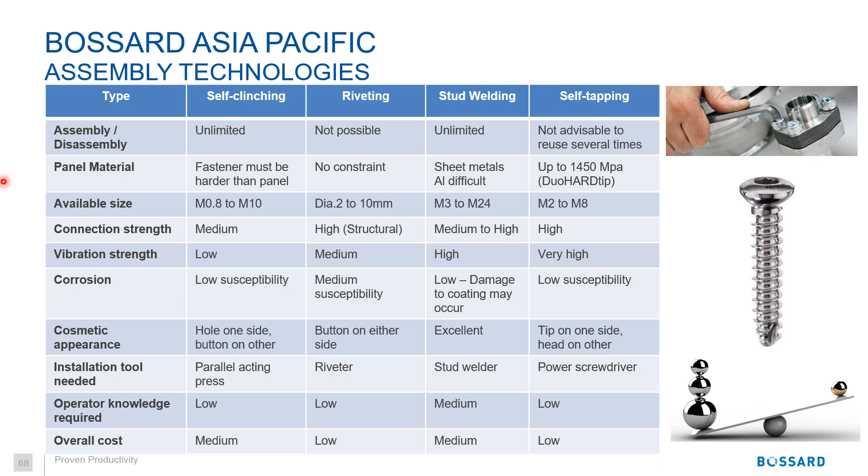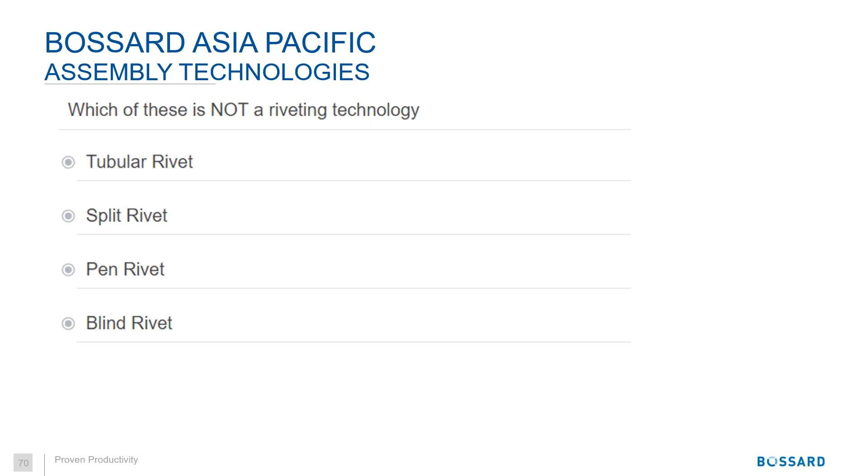Now I've prepared another poll to test your knowledge and see if you've remembered what we've discussed. I'm going to start and launch the question for you to answer. Okay, the question is now available on your screen: which of these is not a riveting technology, not a category of rivet? Is it a tubular rivet, split, pen, or blind? I'll leave 15 seconds for you to answer.

Okay, I'm going to close the poll and answer the question. Obviously, the type of rivet that is not a riveting technology is the pen rivet. Pen rivet does not even exist. What we've discussed is that 4 technologies exist in the market: solid, tubular, split, and blind rivet.